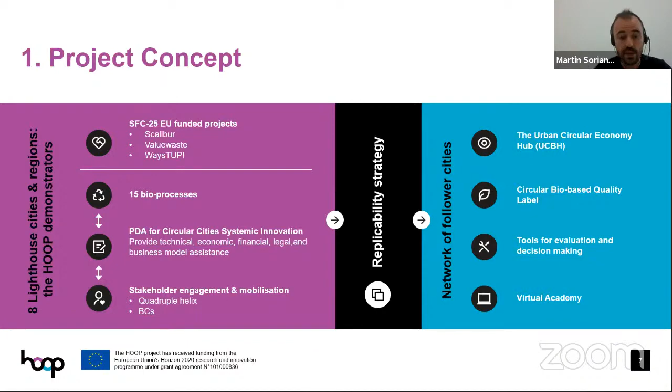And of course, we have a very strong replicability strategy. Replication is very important for the European Commission and for HOOP. So we are in the process of building a network of follower cities, and we are also going to develop a number of tools for making this replication possible.

As I was saying before, in these three mother projects - ValueWaste, SCALIBUR, and WaysTUP - we are testing and developing pilots for a number of technologies, a total of 15 technologies that we are offering to our cities and regions. Here you have the description of the different technologies from the mother projects.

These technologies are for the valorization of the organic fraction of municipal solid waste, and also for the valorization of sludge, of urban wastewater sludge. So this is pretty much, in a very brief way, what HOOP is about.

And now I'm going to focus on today's webinar. Technology is one of the main challenges covered by our HOOP PDA - in particular, providing assistance on technologies to valorize the organic fraction of municipal solid waste and urban wastewater sludge into added value bioproducts. So the objective of this webinar is to highlight some of the most promising technologies from our mother projects.

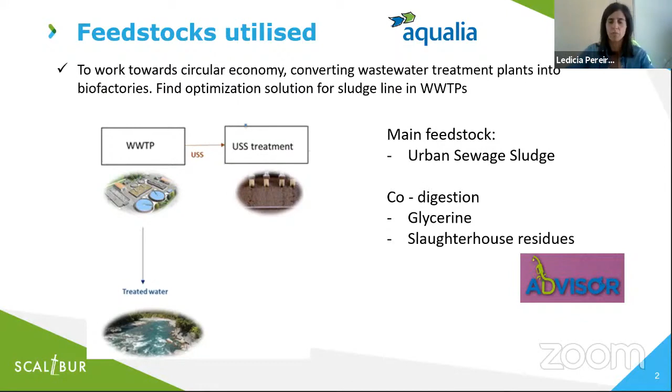We also try to implement co-digestion, which is not widely implemented in Spain due to legislative barriers. However, we want to work on this. For example, we've tried to co-digest glycerin, a byproduct of biofuel production, and also residues from slaughterhouses, which is a common industry in Spain. Indeed, at Aqualia we have a different project apart from SCALIBUR, called Advisor, which works completely with slaughterhouse residues.

So this is the general picture of Aqualia's activities within SCALIBUR. We try to touch every part of the conventional sludge treatment line of a wastewater treatment plant, and try to optimize it starting from the sludge pretreatment.

For example, we've tried different thickening technologies, such as solid-gas mixing. We've tried electric fields to hydrolyze the sludge before the next processes, and we've also tried physical and chemical treatments.

Then the core of our activity is to move from conventional mesophilic anaerobic digestion processes, which are the most widely implemented in wastewater treatment plants, and go a step forward to propose new advanced technologies.

So we are working on dual, or two-phased, anaerobic digestion. And we're also trying to develop a solution for treating sludge in small wastewater treatment plants.

So then we have two streams from this anaerobic digestion. We have the biosolids, which, if we comply with European legislation, can be used as soil remediation if they are pathogen-free. And then we have the biogas, which we upgrade to methane using our own technology, called ABAD. I'll explain about it later.

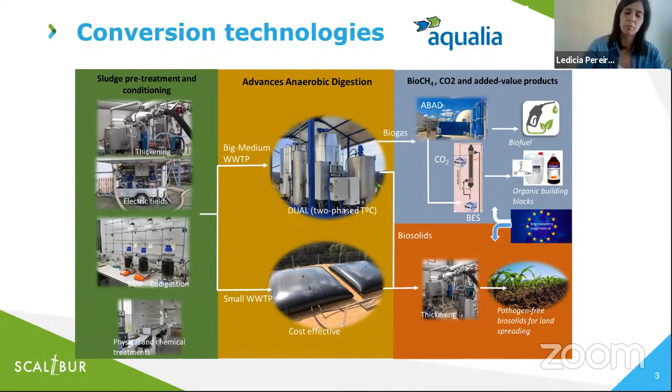So I'm going to talk a little bit more in detail about the three main technologies we've been discussing. The first one is the dual anaerobic digestion. Basically, we are trying to split conventional mesophilic digestion into two different stages.

The first stage would be a thermophilic digestion running between 65 and 55 degrees. The aim of this is sanitation.

So here the hydrolyzation, acidogenesis and acetogenesis is happening in this reactor.

Then all the methanogenesis happens in the second reactor, which runs at 37 degrees. The main aim of this is sludge reduction, because we are optimizing organic matter reduction, so we will obtain less sludge to manage in the end.

The second aim is sanitation, so we comply with European legislation to spread the biosolids on land. We then optimize bioenergy production and reduce chemical consumption, because we have better quality biosolids and less biosolids, so we'll use less polyelectrolyte, for example, to dewater the biosolids.

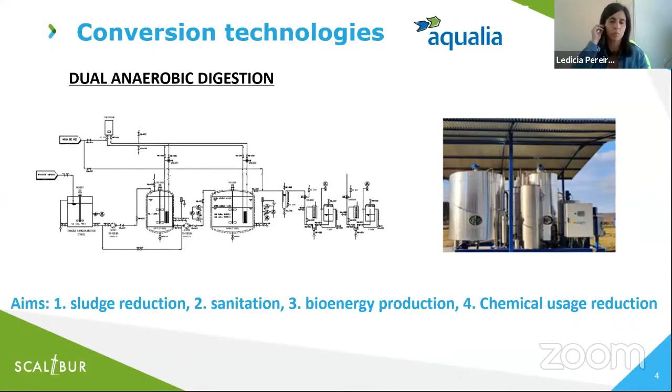So the second technology I want to share with you is decentralized anaerobic digestion. In Spain, around 30% of the sludge is produced in small wastewater treatment plants, which don't have any type of treatment. So we want to develop a technology suitable for this scenario without losing a low cost horizon.

For that purpose, we are using this type of bags, which are widely implemented in the agricultural sector. But we want to try them with urban sewage sludge, with some improvements such as recirculation.

With this, we want to find an in-situ solution for this sludge, so we have to transport less sludge to other places, reducing CO2 emissions.

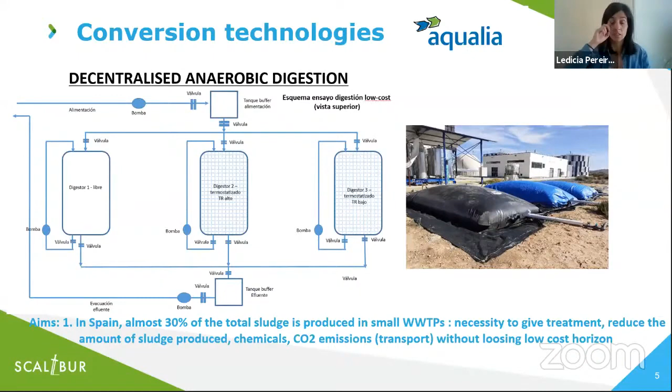The last process I want to talk about, which is the core process, is this transformation of CO2 into added value products. Basically, the biogas goes through an upgrading system, which is an absorption column, a patented system by Aqualia called the ABAD system.

So we have concentrated biogas methane going up from the column, and then we have the liquid stream in the bottom of the column, which is CO2 dissolved in water.

This goes to a bioelectrochemical system, which has an anode and a cathode. In the cathode, biofilm is growing, and within this system, different electrical and biological reactions are happening, producing volatile fatty acids, mainly acetate.

So the main aim of this technology is CO2. It's a CO2 sink, and we produce added value products from this. This CO2 can come not only from biogas from wastewater treatment plants, but also from solid waste digestion, or it could come from any CO2 source you can imagine. If this technology is scalable, then it will be a really big success.

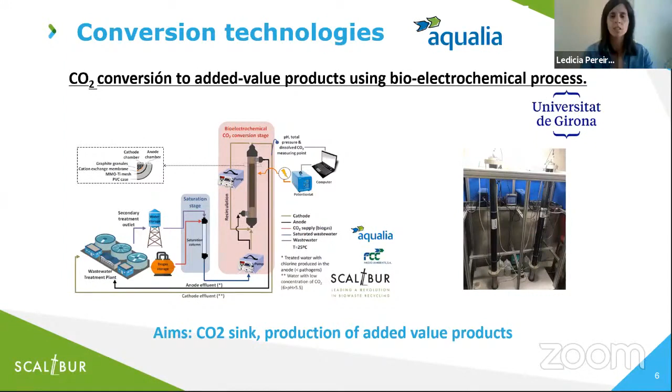So rapidly, as I've said, our end products are biosolids and acids and alcohols from the BES.

Opportunities and barriers that we see: opportunities basically maximize methane production. Methane is used in cogeneration units, and it can be used as a fuel for vehicles. But we see methane as a future potential platform for other chemicals, such as H2, that can be used in fuel cells, or ectoine. So optimizing methane production can also be a success.

So then produce biosolids for land application, and this CO2 sink is also an opportunity.

Challenges we see: with the dual anaerobic digestion we are testing, we are at the limit to achieve the 4th draft European legislation for sludge management, especially for Clostridium. We need to manage the methanogenesis in the first reactor, the thermophilic reactor.

And also we have to consider alternative treatments for biosolids. Anaerobic digestion is an alternative, but we know there are other alternatives being studied now, such as pyrolysis, gasification, biohydrogen production, etc.

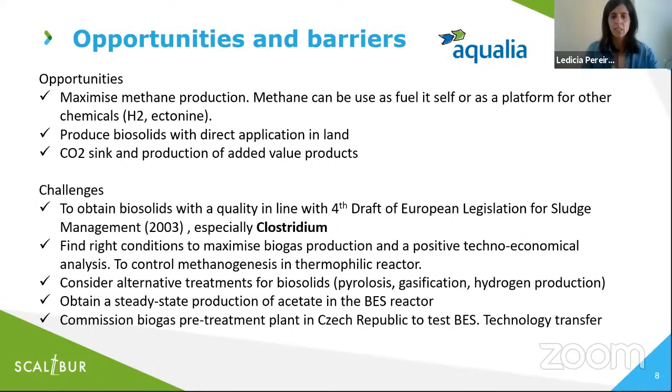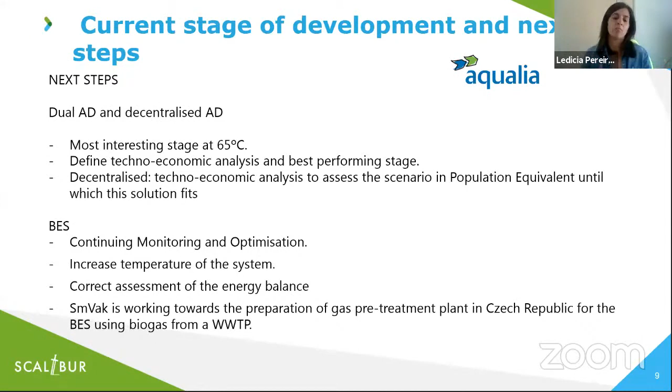Well, and then finally, just to finish: with all the data we are gathering, we have to produce techno-economical analysis and energy balances, just to make sure that the technologies we are offering are in line, are cost-effective, and have a positive energy balance compared with other technologies. So that's the final aim, really.

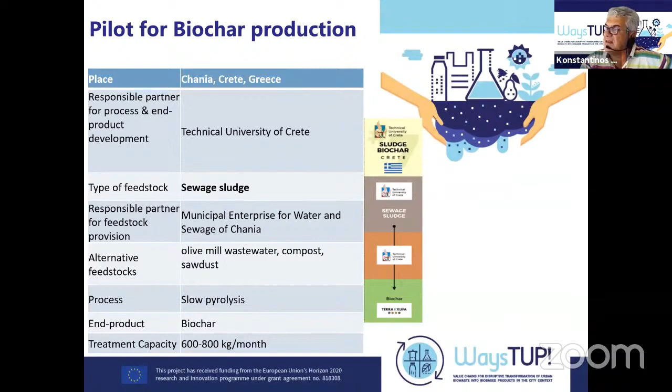So for the production of biochar, we use slow pyrolysis, which is a very old method in metallurgy for the production of metals and the treatment of ores. So we took advantage of the knowledge we had for this industrial process, and we used it for the production of biochar at lower temperatures, varying between 300-350 to 400-500 degrees.

So in order to produce biochar, we obtain all these feedstocks. We see our young researchers wearing masks, not only because of COVID, but because of the smell of some raw materials, especially the olive mill wastewater. So we obtained the sewage sludge and the other raw materials from the area of Chania in western Crete.

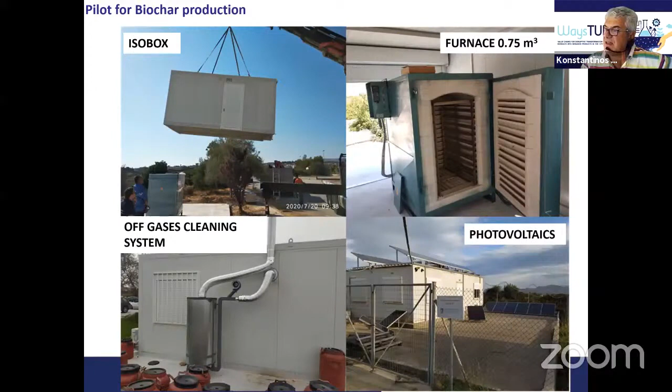We purchased a big furnace with a capacity of 750 liters. We placed this furnace in an isobox. We established an off-gas cleaning system, and we plan also to use electricity from photovoltaics, since this park is next to our unit, in order to reduce the production cost.

So actually, we use this feedstock, we apply slow pyrolysis, we try to clean up the off gases, produce biochar, and then apply this biochar in greenhouse and field applications.

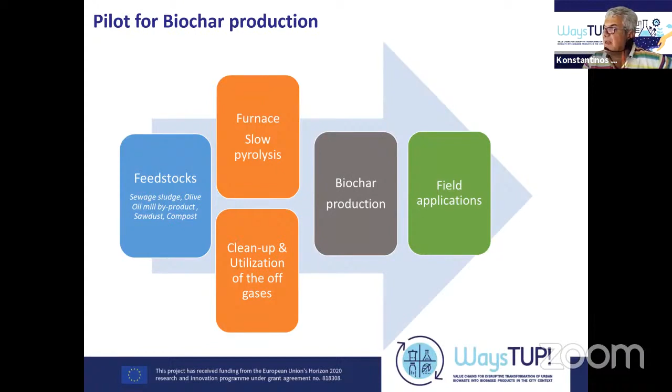So the objective is to valorize agricultural waste and produce something which can be used instead of fertilizers, but mainly, most importantly, as a soil conditioner. Because there are several types of soils with different requirements in nutrients, and this biochar can be used in several cultivations, we aim to optimize the process.

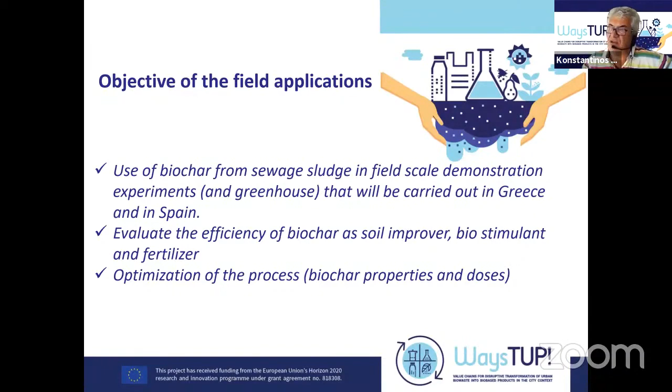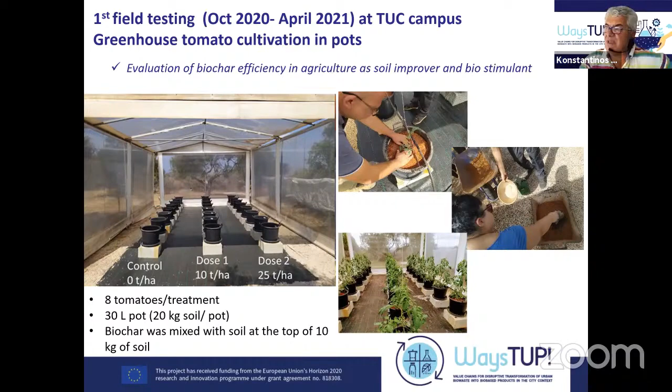You see here, very briefly, the greenhouse, the pots we used, and the rates of biochar we used. We applied, let's say, in situ rates varying between 10 tons per hectare and 25 tons per hectare. Of course, we had the control experiments. You see here all the preparations.

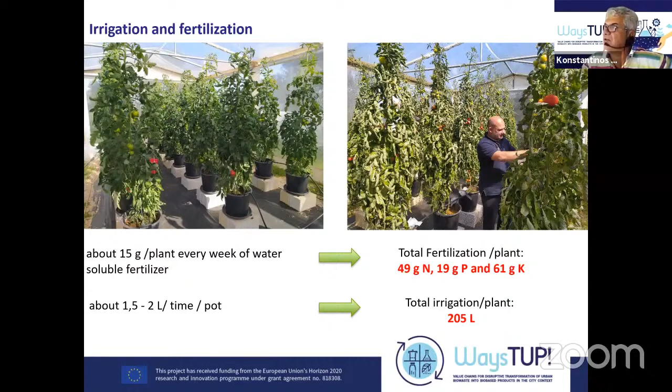You see our first greenhouse cultivation with tomatoes. It's like a small jungle in Crete. The tomatoes grew very well, and we had a lot of high productivity. You see on the right side of this slide the fertilization and irrigation we used over this first period, from the autumn of 2020 to the early spring of 2021.

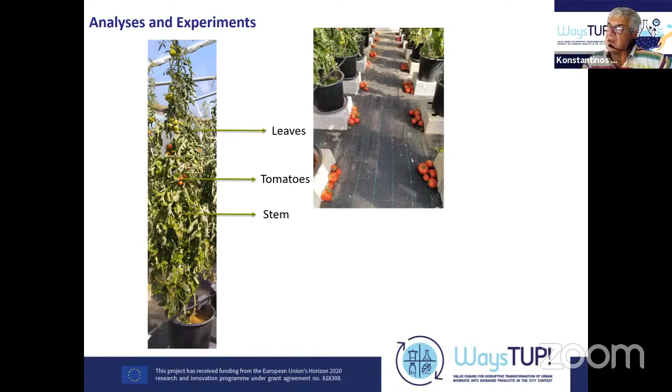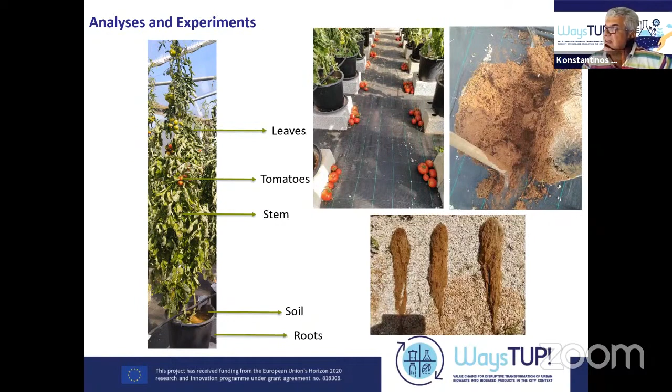So we analyzed all parts of the tomato plant. You see here the many tomatoes we collected, and believe me, they're very, very tasty, probably much tastier than those you can buy in the market. So we've done analysis. You see the roots of the plants. The plants grew very well, and we're quite happy. We've done several analyses of all these parameters, no need to mention them.

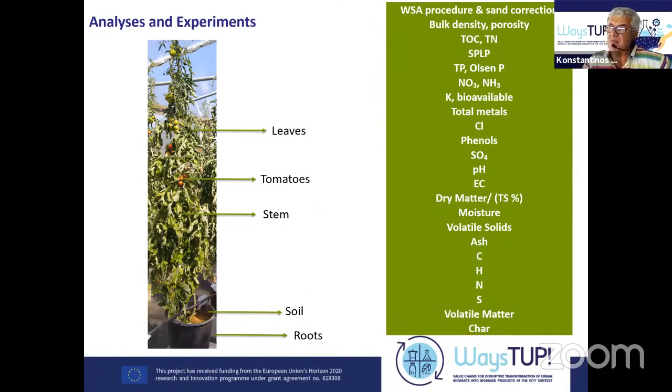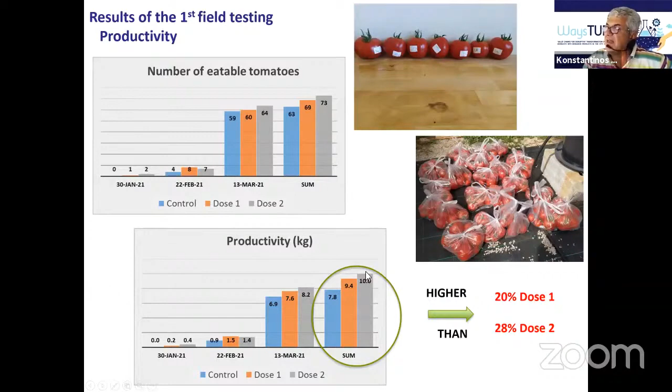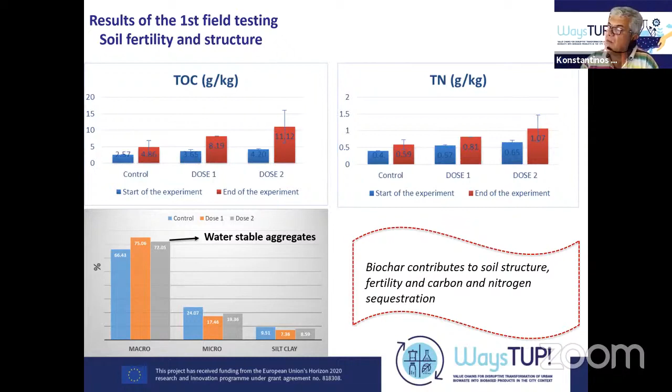And in terms of optimization, we try to produce biochar with the appropriate acidity in order to be used also in acidic soils or soils with higher pH.

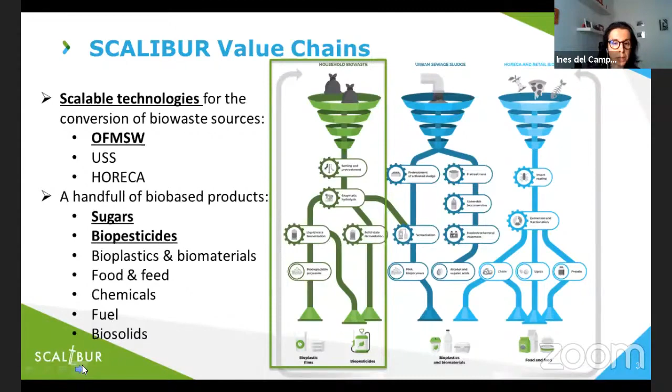CENER is focused on the valorization of biowaste for the production of sugars through an enzymatic hydrolysis process, producing sugars and biopesticides. Also, the sugars will be used for the production of bioplastics by other partners.

What is the hidden potential of the organic fraction of municipal solid waste? We think it is a very valuable feedstock due to its high availability, as the amount of biowaste produced every day is very high. Approximately 200 kilograms per European per year. The generation is very stable and distributed along the territory, and there is an existing and well-developed logistics for collection. Additionally, legislation supports mandatory separate collection.

We also need to reduce the amount of biowaste going to landfill, so it's a very good opportunity to extract value from this material.

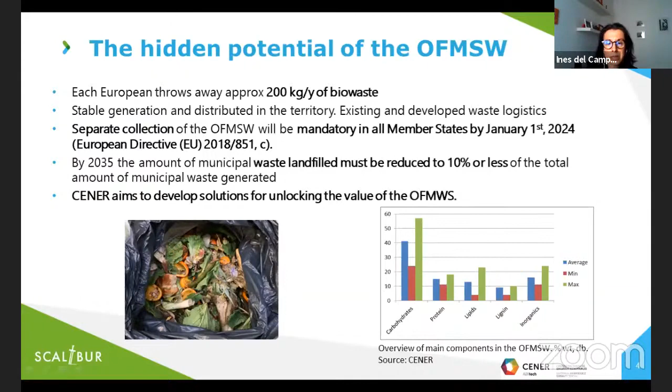We know it's a very interesting material because it has very valuable components. As you can see in this figure, there is a high amount of carbohydrates, proteins, and lipids. There is also lignin, depending on the source of the material, and inorganics that can also be valuable.

What is the solution we are developing within SCALIBUR? The idea is to demonstrate the production of fermentable sugars from this biowaste at TRL 6-7 demonstration scale. We are also validating that these sugars can be used in a fermentation process to produce bacterial biopesticides, and we are performing a techno-economic and environmental sustainability assessment of the whole value chain.

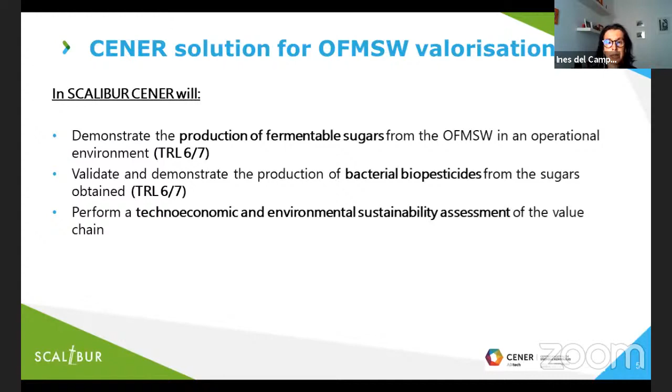This is the approach we are developing in the project. First, we optimized and validated the process at pilot scale, all stages from pretreatment of the biowaste through enzymatic hydrolysis and optimization of enzyme doses. The enzymes have been developed by another partner in the project, ASA, and we have validated the process at pilot scale, at 200 liter scale.

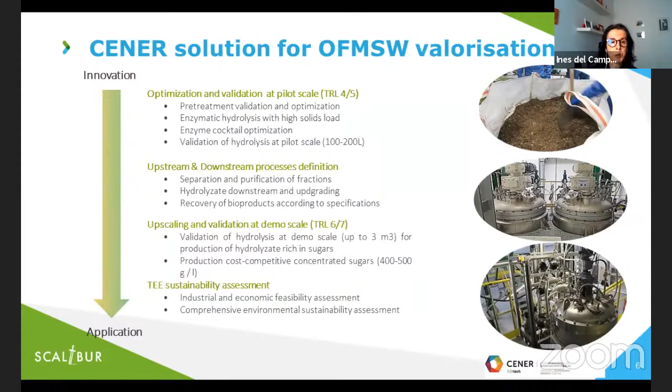In parallel, we are optimizing the upstream and downstream processes to get a fraction of sugars concentrated and purified for downstream processing. We are upscaling and validating the process at demo scale, at a higher TRL between 6 and 7, using 3 cubic meter reactors, aiming to produce a concentrated sugar stream between 400 and 500 grams per liter. We are also performing the techno-economic and environmental sustainability assessment.

We started the demo scale assays in our plant last year, at the end of 2020. Here are some pictures of the assays in the plant: reception of the material, loading the reactors, and discharge. We are processing approximately 2 tons of biowaste per run, and we completed 1 demo run, with two more expected by the end of 2021.

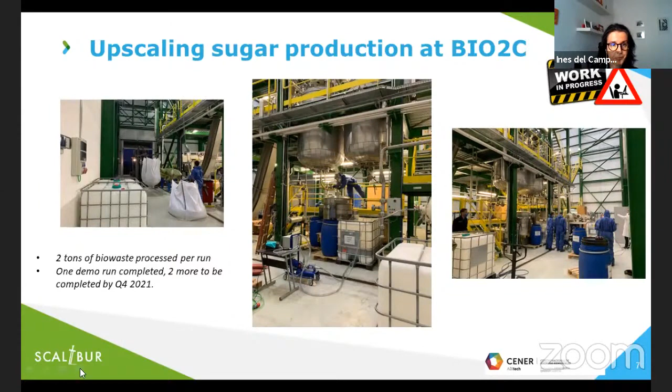The expected results of this value chain are the demonstration of an enzymatic hydrolysis process with high solid load in 3 cubic meter reactors. We are planning to produce approximately 500 kilograms of concentrated sugars.

We are also applying technologies to reduce the presence of inhibitors, mainly organic acids, and trying to improve the viscosity and pumpability of the hydrolysate and concentrate for use in further fermentation processes. We are developing an ad hoc separation, purification, and concentration process to obtain a valuable concentrated sugar for this fermentation process.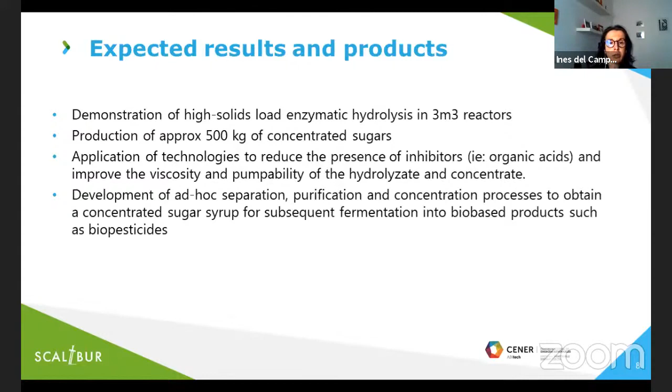Which are the opportunities and barriers? As I said before, we see a very important opportunity in the use of the organic fraction of municipal solid waste, as it is a very high available, low cost, and circular feedstock for the production of bio-based products. We can produce cost competitive sugars that can be used as building blocks for bio-based industry. And we are also contributing to the circular economy because we are trying to reduce waste and stimulating sustainable growth, contributing to Europe's green recovery.

Regarding the barriers, we have seen that due to the heterogeneity of the bio-waste, the quality depends mainly on the collection systems and the practices in the cities. Of course, the more inerts and inhibitors in the feedstock, the more complex and expensive the conversion processes, because you have to include additional stages in order to reduce the amount of this material. And also another barrier is the public perception of the products derived from the biowaste.

Now, just a brief overview of where this approach links with our activities in CENER, in the Biomass Department of CENER. This links with what we call the circular urban biorefinery. The Biomass Department of CENER is very focused on taking out the value of different types of wastes in order to get different valuable compounds from them.

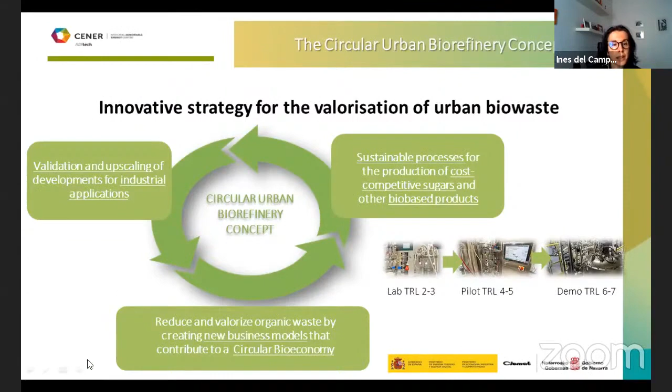And here you have some information about our plant for the production of these compounds. We have a plant which is called Bio2C, the Biorefinery and Bioenergy Center, which is very close to our headquarters. So we have different units, a biochemical, pretreatment and a gasification unit. And it's a very interesting facility to develop different types of processes and for upscaling processes and supporting the market uptake of bio-based processes. And that's all from my side.

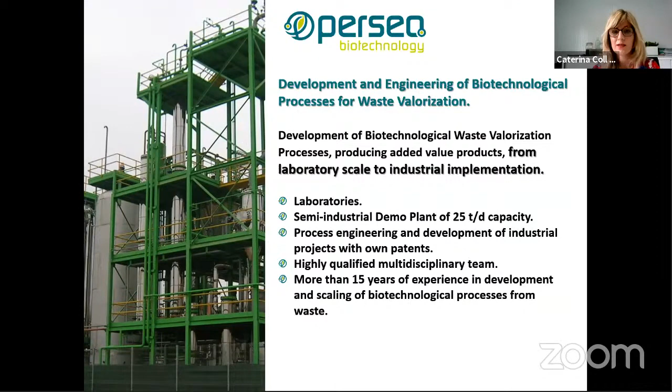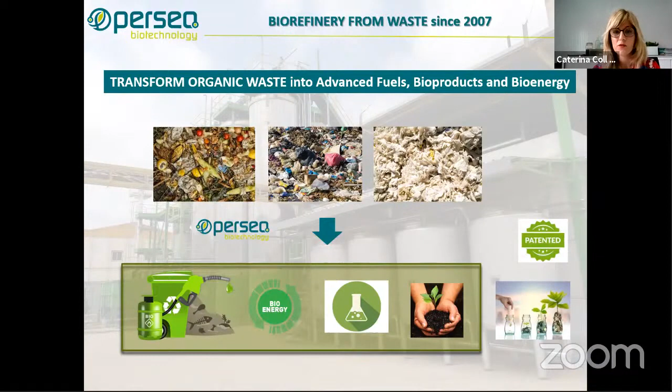Here we can see our expertise, because we have been working since 2007 in a demonstration plant with a capacity of 25 tons per day, focusing on valorizing the organic fraction of waste and cellulosic waste through a patented process into bioproducts and bioenergy. We have specific processes just to obtain bioethanol with different qualities, to be used as a fuel mixed with gasoline, and as a chemical building block to produce other bioproducts. And this is our role in the WaysTUP project.

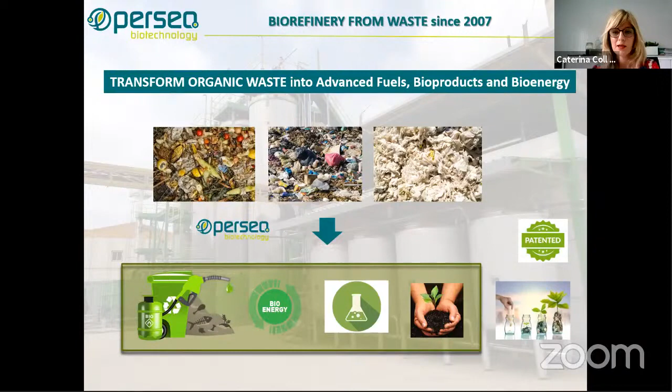Okay, how do we work, which is our approach, and that is the same approach that we use in the WaysTUP process. First of all, we do a laboratory optimization of the process at lab scale.

When we have our objectives and good yields of this bioproduct, we scale up this process in our demonstration plant, and we do continuous work just to obtain a viable and profitable process, to pull this process to the market, because we are always working on demo processes, ready to be installed in the market. For example, our PERSEO bioethanol process that now is in the commercialization stage, and the idea is just to arrive at the market and to the final client of the process.

The main objective of the WaysTUP project is just to create new value chains for bio-waste utilization, the bio-waste that we produce in our municipalities. And the project has a multi-stakeholder approach in line with the circular bioeconomy.

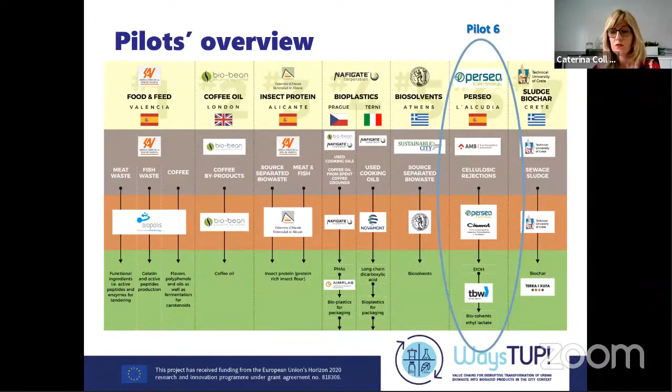In WaysTUP project, we have 7 different pilots in which we treat different kinds of waste, such as municipal solid waste, coffee waste, food and feed waste, and in our case, in pilot 6, we are focused on the cellulosic rejection wastes, which can of course be mixed with municipal solid organic waste.

The aim of pilot 6 in the WaysTUP project is to adapt our patented PERSEO biotechnology, which focuses on the valorization of the organic fraction of municipal solid waste, to produce a second generation bioethanol that in the same project is used to produce ethyl lactate via reactive distillation, a solvent that can be used in the pharma and food markets.

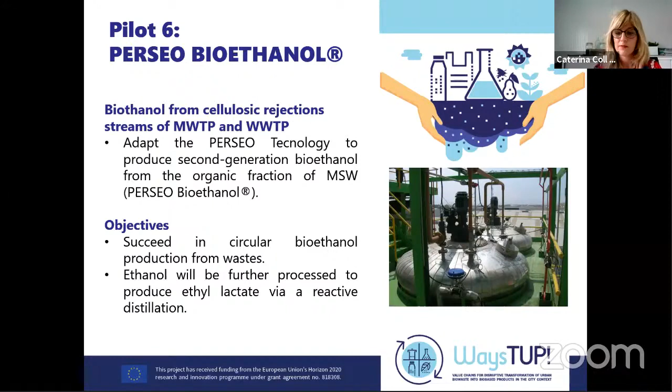In the project, we tested different cellulosic wastes that are produced in our cities: wastewater treatment plant wipes, the paper and cardboard that can't be recycled in the municipal solid waste treatment plants, and sanitary textiles such as diapers, just to obtain these bioproducts.

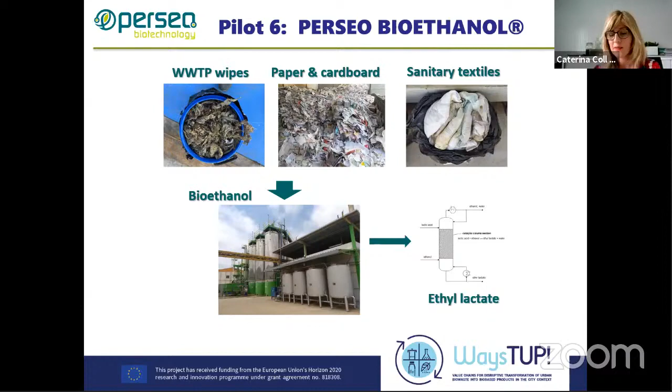In the first stage, we improved the processes to obtain good yields of bioethanol for these 3 different wastes. After this, we adapted our PERSEO bioethanol plant to be able to treat these cellulosic wastes. And after this, the bioethanol we produce with quality as a chemical building block is used to produce ethyl lactate.

At this moment in the project, we finished the optimization at lab scale. We tested different conditions for each raw material. We finished the process, worked on the new process design and the adaptation of the process in our PERSEO biorefinery, and at this moment we are starting the demo activities at a big scale.

In our plant, we have fermenters from 10 cubic meters up to 15 cubic meters. The idea is to scale up the process in real conditions, real engineering conditions. We always work with equipment of industrial size, to be sure that when we scale up, we detect and improve the problems we are going to have in a real industrial environment, and then we decrease the technological risk in scaling up the processes.

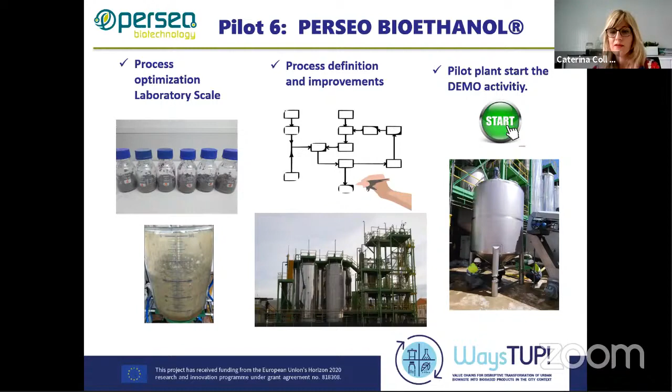Because, as I said before, our aim is just to scale up this technology to the final client. And that's all from my side. Thank you for your attention. If you have any question, as Martin said, I will be available at the end of this.

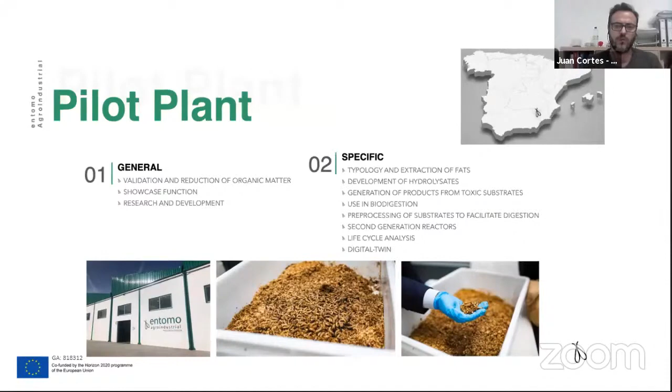In another industry, you have some base knowledge you can apply to your facility. In the case of this new emerging insect farming industry, there isn't base knowledge about that, it has to be created new. So in our pilot plant, we have this structure for companies to use this knowledge.

Obviously we are in the new generation with digitalization, and we don't want to stop just at the biological part of the larvae or the production — we also want to digitalize. So we are in the process of digitalizing the whole process from the things that enter to what goes out. If you have an insect farm contracted by us, you just get your cell phone and see how many larvae are entering your system today and how many kilograms of protein you are getting.

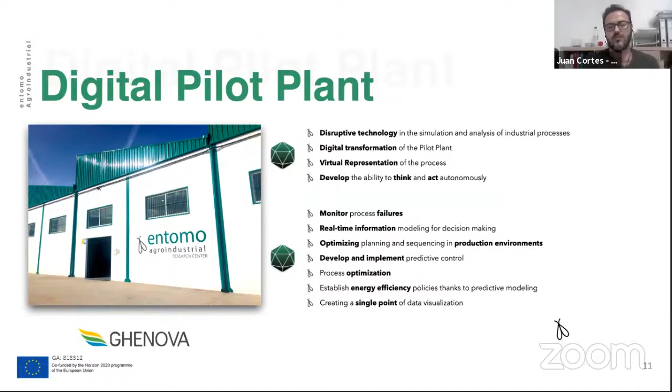Just to talk a bit more about the ValueWaste project and our contribution: we also created the demo plant, a container located in Cañada Hermosa. We reconstructed a disposed container to make it more circular, which is the ecological part. This container is mainly to demonstrate the process with urban biowaste and digestate.

What I can tell you right now is that the larvae don't like the digestate, but they love the biowaste. We've already identified the reasons why they don't like the digestate. I don't have time to explain here, but we can make some readjustments to allow them to start eating the digestate, which would be a big thing.

For the proportion, we need about 6 kilograms of waste to produce 1 kilogram of larvae — a very good conversion ratio. Normally the waste is reduced by about 85%, more than 85% if we're talking about digestate plus raw urban biowaste.

Right now in our pilot we are at about 60% of capacity, and we expect to reach 100% of our KPI indicators very soon. This container should be able to treat 1 ton of waste a day and produce about 160 or 170 kilograms of larvae every single day.

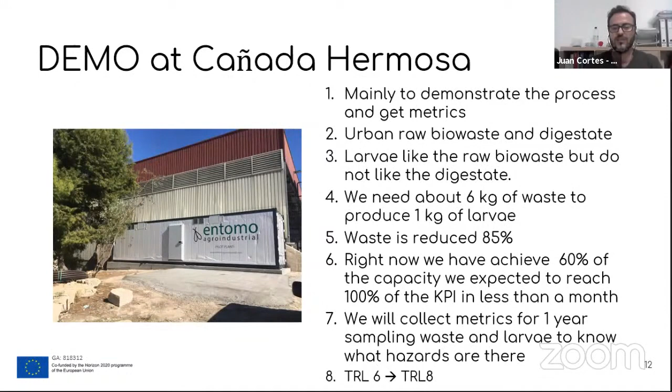Right now we started the process at TRL6, and we expect to reach TRL8 or 9 by the end of the project. I think we are quite advanced on that, and we expect to continue advancing.

Martin, you want to tell me to quit, right? Thank you, I'm not going to say anything else. I didn't say anything. Just appear on the camera. No, thank you very much, Juan.

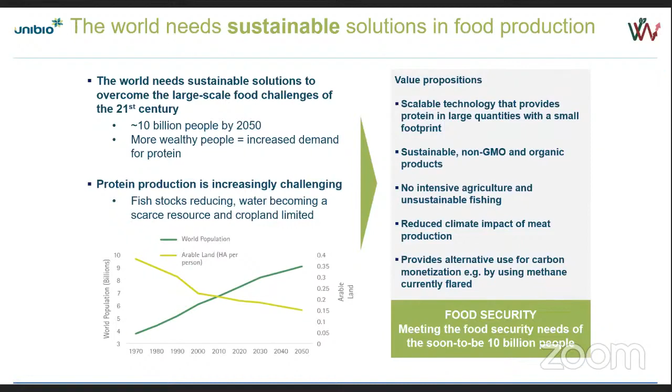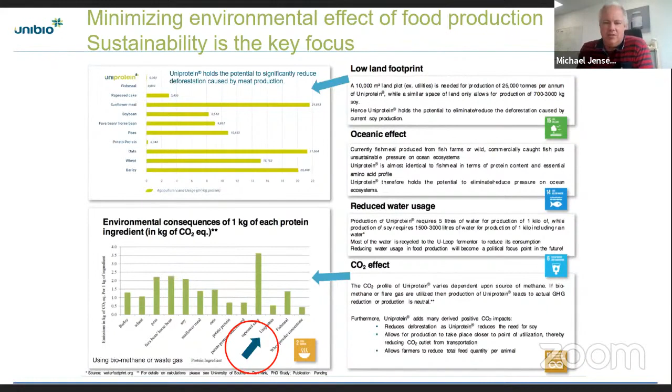I only have 7.5 minutes, so this will be quick. Just to make it short, I think our production and our products are bioeconomical, biocircular, very sustainable, and have a very green environmental profile. I won't have time to dig into the details, but here you can see some of the effects we have, especially on the carbon footprint, where we're really at the very, very low end. I just want to highlight that as a fact, and then move on.

What we are doing here is the bio-waste in this project is turned into biogas. And when you are making fermentation and producing proteins, you need 3 atomic constituents: oxygen, carbon, and nitrogen. The biogas, which is the raw material of ValueWaste here, is our carbon source. So when we do the fermentation, because biogas is a gas, oxygen is a gas, and ammonia is a gas, we can't apply a normal fermenter. So we have to apply a U-loop fermenter instead.

What we do is we produce the biomass, and then we take it through downstream processing, where we apply centrifuge, membrane filtration, temperature treatment sections, and spray dryers. I'll have time to just dig a little bit into the details in a moment.

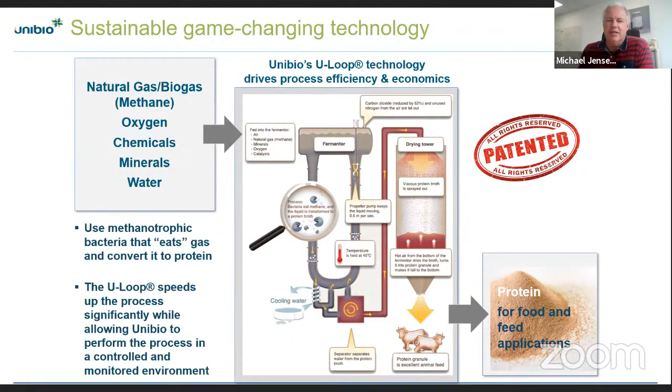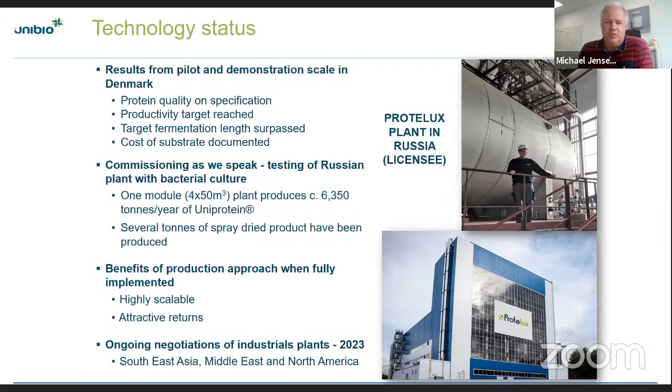And this plant here will be able to produce 6,250 to 6,350 tons a year of biomass product that is dried. So this is the sort of scale of economics we're talking about, which we're able to apply as we speak today.

Just to make it clear, the biomass we are producing, where we apply the biogas from the food waste and waste from restaurants, etc., has an amino acid composition very similar to what you find in fish meal. The important thing is the presence of the 8 essential amino acids is as it should be, and we have more or less the same distribution of these amino acids as what you find in fish meal and in soy protein concentrate.

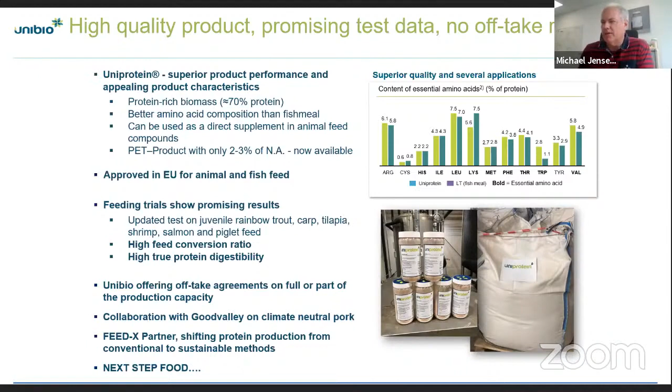Let's dig a little bit into it. The food strategy we have and the forecasts out there, you can see, will be growing dramatically.

Whether we apply the protein and biomass products we create as a feed product, a food product, or perhaps even as an ingredient to cultured meat products, if we don't look at the economics and just look at the biomass as such, we don't really care, because there'll be demand for everything. You simply have the biomass available to feed these areas.

So this is the development we see, that we'll have enormous growth coming in the years to come, because the number of people on this planet will be growing. This is how we see it.

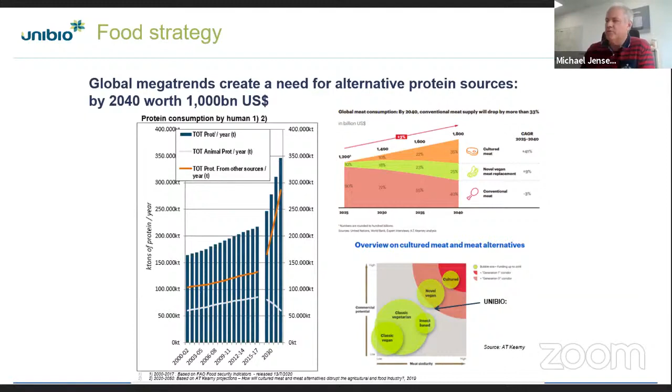Looking at some ballpark figures, we estimate right now that the total protein demand for the feed application area and the food application area is in the range of 400 million tons. If we just look at 1% of that, we're talking about a potential of roughly 4 million tons.

Bear in mind, the first industrial modular plant we installed will only be able to produce about 6,000 tons. So my point is the market potential out here for these new ingredient products, both from the black soldier fly you heard about before from my colleague, and the technologies we're representing here, the bacteria protein concentrate powder, will be enormous.

So the challenge for us is simply not to create a demand and sell the product. The challenge for us is to build, in terms of creating capex and opex costs, at a sufficiently high speed to really cover the demand we have in front of us. This is the challenge we have. The challenge is not to sell the products.

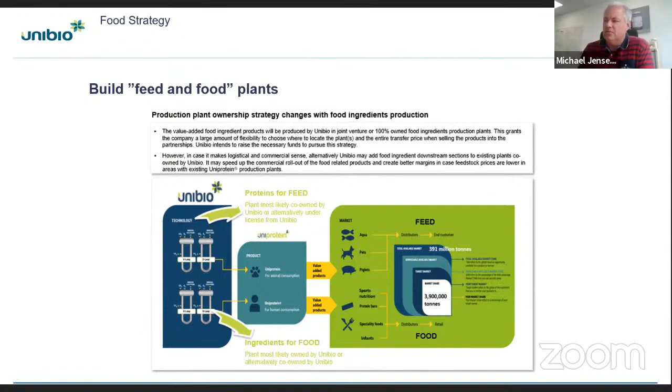So if we look at what we've actually done with this biomass, this is just a fermenter you see here, where we simply make sure to save the biomass available. But what we've actually accomplished is, instead of just looking at the biomass, we have managed to fractionate and isolate some of the building blocks of this biomass.

I've decided to present two building blocks today. One is the area where we're playing around with reducing the nucleic acid content from 7 to 8% down to 2 to 3%. The fraction you create here will then be a biomass with a reduced content of nucleic acid.

You will have a stream where you have bacteria protein concentrate or bacteria protein isolate. That means you will have concentration of proteins in the dry matter in the range of 35 all the way up to 90%. You will have a nucleic acid fraction, and you will have a mineral fraction as such. So this is one way of going.

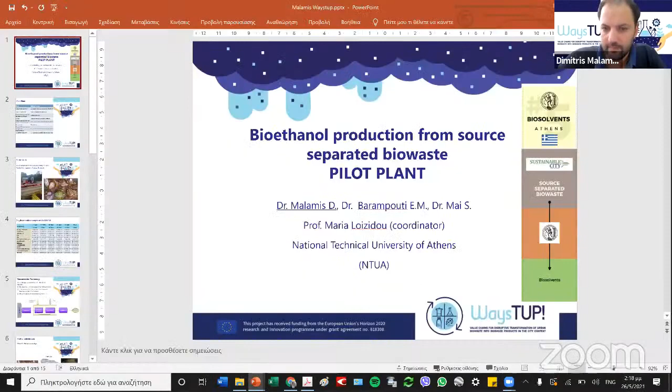Hi, Martin, can you hear me now? I had to leave the webinar and just enter again. Okay, now I'm just sharing my screen, just give me a second. Can you see the presentation? Yes.

Hello everyone, my name is Dimitris Malamis. I'm going to give you a presentation on behalf of NTUA. Professor Maria Loizidou is the coordinator of NTUA in the WaysTUP project, with a research team also composed of Barampouti Eli and Mai Sofia.

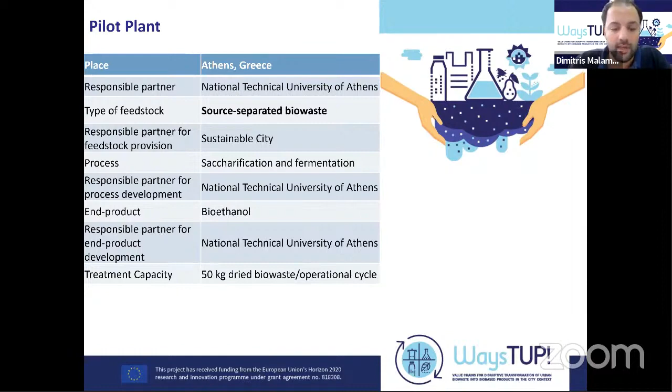We're developing a pilot plant aiming to convert organic fraction of municipal solid waste to bioethanol within the framework of the WaysTUP project. The plant is installed at NTUA premises in Athens, Greece. We use source-separated biowaste as feedstock, including food waste and green waste. Sustainable City, a project partner, is responsible for providing the feedstock, and NTUA is responsible for operating the unit. The plant aims to bioconvert source-separated biowaste to biosolvents, mainly bioethanol, via saccharification and fermentation.

We performed systematic sampling and characterization of the collected feedstock for the municipality of Vari Voula Vouliagmeni, located in the Attica region in Greece. Up to now, we've performed 5 waste analysis campaigns. The results show that the composition of the collected biowaste has low fluctuation, and the total carbohydrate content is sufficient, over 45%, in order to produce bioethanol. We conclude that there is high potential for bioethanol production.

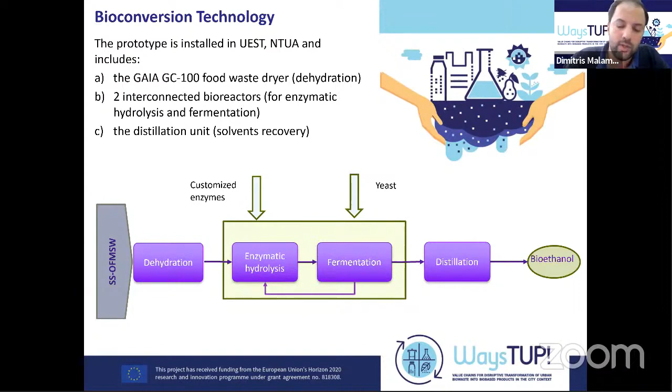About the prototype system: it initially includes a commercial food waste dryer aiming to dehydrate the collected feedstock. Then we have two interconnected bioreactors where the main bioconversion process takes place by enzymatic hydrolysis, using customized enzymes, and then fermentation by providing yeast. The final stage is the distillation unit, which aims to recover the solvents, essentially to recover bioethanol.

Food waste typically has high moisture content, which can be more than 75%, and in some cases up to 98%. By using this dryer, the weight and volume are reduced by evaporation of the water content, producing a dried, manageable end product that has been sterilized and stabilized. Therefore, the dried material does not smell and can be stored for many weeks without degradation.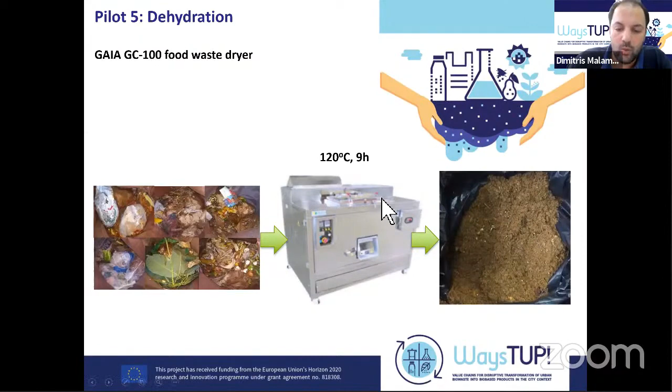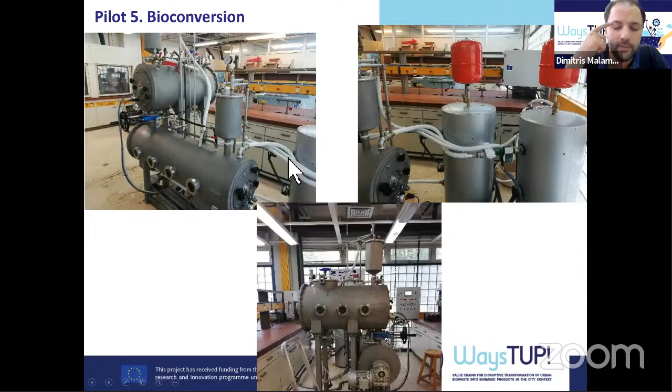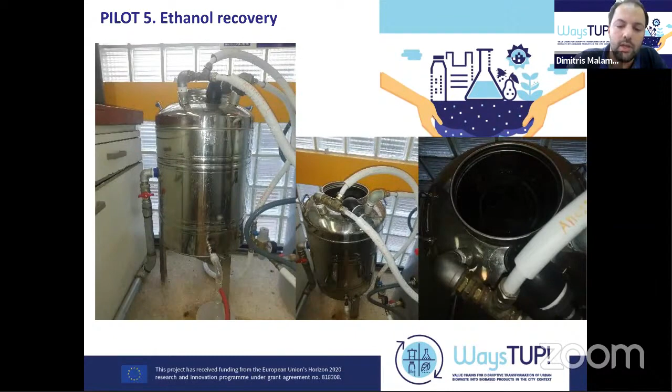We have validated the drying system using sorted biowaste. The second stage is the bioconversion system, composed of two interconnected chambers, each with a volume of 200 liters, and a rotating shaft for mixing the substrate. We did all the necessary work to operate it for the WaysTUP project cases. Then we have the distillation unit, designed and constructed to recover the produced bioethanol, and a PLC system to fully control the operation of the pilot plant.

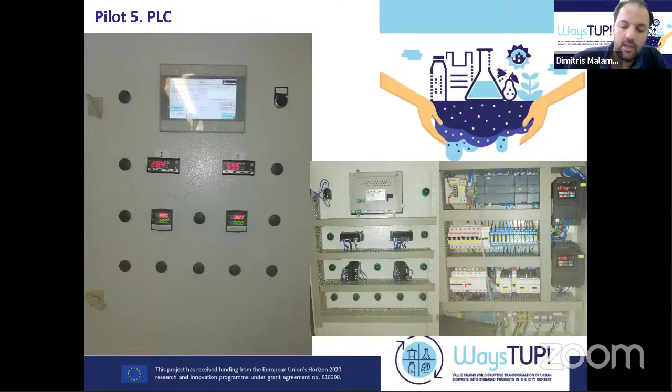Here I have a short video presenting the operation of the pilot.

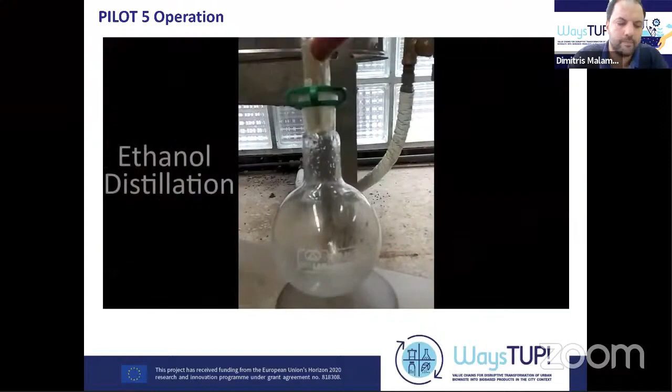After verifying all the different parts of the pilot unit, we performed the first pilot trials using the system. For enzymatic hydrolysis and fermentation, different strategies were applied in order to explore and optimize the process. We used different conditions in terms of feedstock loading, process applied, and enzyme times and dosages. We've been working with Novozymes in order to provide us with the necessary enzymatic formulations, either commercial or non-commercial.

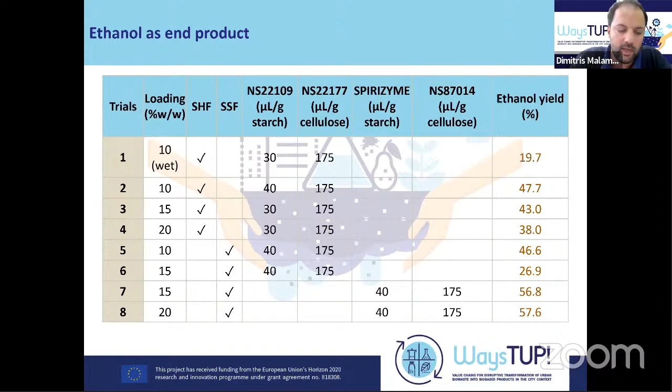From the first results, we found that ethanol yield can amount to around 58%. The results show that this is a promising approach. At this stage, we're developing the optimization process, and once achieved, we will continue with the necessary cycles in order to get the necessary data.

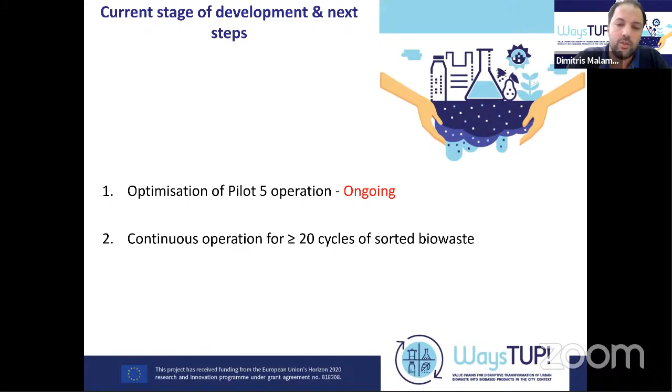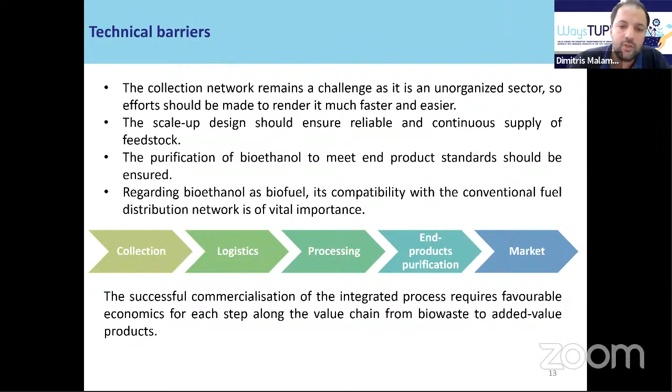Of course, there are technical barriers that need to be resolved, such as the fact that we need to have the necessary feedstock to feed the system. So there are some challenges there. Scaling up is not an easy deal, so we have to have a reliable and continuous supply of feedstock. Another issue of concern is the purification of the bioethanol produced to meet the necessary standards. And apart from the technical issues, there are also various barriers in terms of economics, environmental policy, as well as social barriers.

Most of these are part of the WaysTUP project to deal with, and some of this could be an issue of discussion at the end of this session. So at this point, I would like to thank you for listening, and the floor is yours now, Martin. Thank you all.